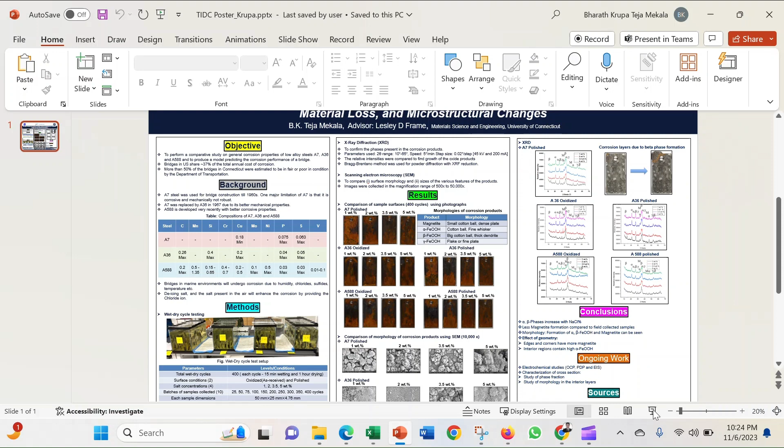As shown in the title, Prediction and Prevention of Bridge Performance Degradation Due to Corrosion, Material Loss, and Microstructural Changes, this work mainly focuses on steel corrosion, specifically the steel used for bridge construction.

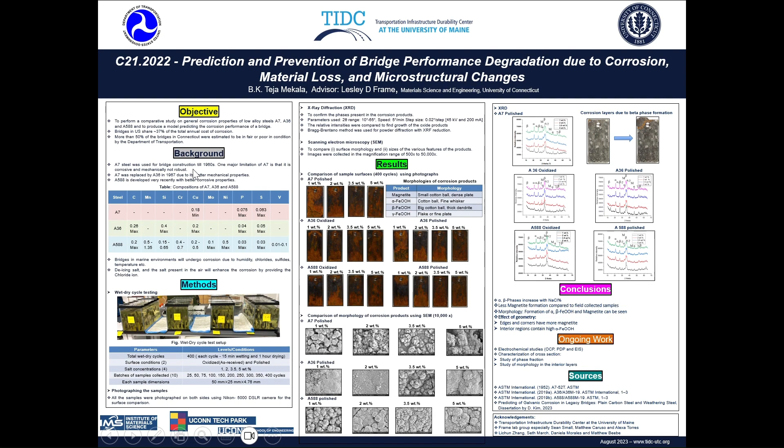This work focuses on the low alloy steels A7, A36, and A588 to study the general corrosion properties and to produce a model at the end of the study to predict corrosion performance.

Before going into the details, I would like to share a couple of facts: bridges in the USA account for 37% of the annual total cost of corrosion. On top of that, more than 50% of bridges in Connecticut were estimated to be either fair or poor in condition by the Department of Transportation.

I would like to give a little background about the low alloy steels that are used for bridge construction.

A7 steel is one steel that was used for bridge construction until the 1960s. As shown in the table, the composition of A7 does not specify any limits regarding the alloying elements except copper, phosphorus, and sulfur. One big limitation of A7 steel is that it is poor in corrosive properties and not robust mechanically.

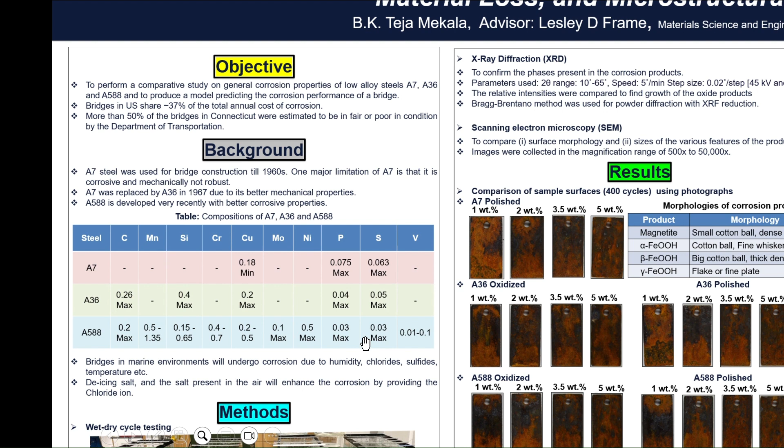With many modifications, A36 steel was developed, which specifies the limit of carbon and silicon, along with copper, phosphorus, and sulfur. But still, A36 steel was not very good in its corrosive properties. Later, in more recent years, A588, also called weathering steel, was developed.

Another reason why bridges in Connecticut face poor corrosive properties is because of the marine environment, which poses salt in its surroundings. Even the de-icing salt applied during winters causes corrosion problems by providing chloride ions.

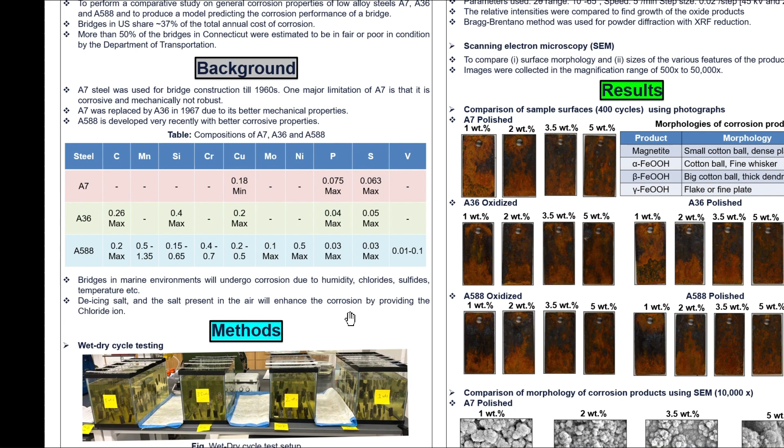Now I would like to talk about how we perform the study to understand the corrosive properties of these steels.

We used the wet-dry cycle testing method as shown in the figure. We took water tanks of 10 gallons in size each, with each tank designated for a specific salt concentration. Four salt concentrations were used: 1, 2, 3.5, and 5%.

Two surface conditions of the samples were used: oxidized and polished. In the wet-dry cycle testing, each wetting time in the cycle is 15 minutes and drying is for 1 hour, with 400 such cycles performed.

Batches of samples were collected at different time points as shown in the table. Each sample's dimensions were 50 mm by 25 mm by 4.76 mm, and the collected samples were photographed using a Nikon 5000 DSLR camera for surface comparison.

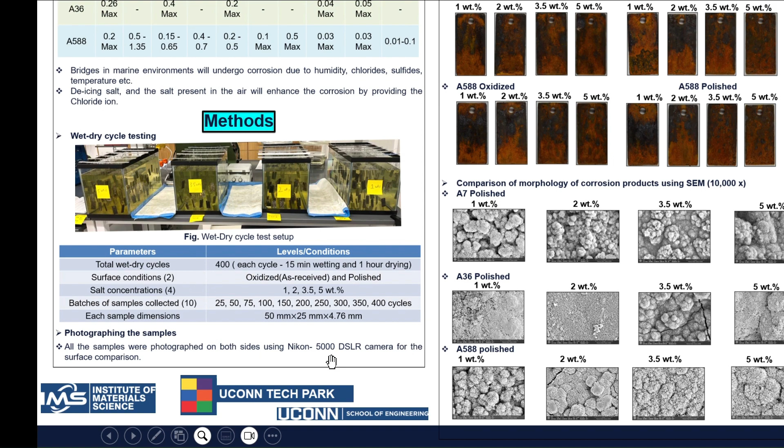Once the samples were collected, X-ray diffraction was performed to confirm the phases present in the corrosion products, with the parameters used mentioned here.

The 2-theta range used was 10 degrees to 65 degrees, with a speed of 5 degrees per minute and a step size of 0.02 degrees per step. The Bragg-Brentano method was used for the powders with the XRF reduction mode.

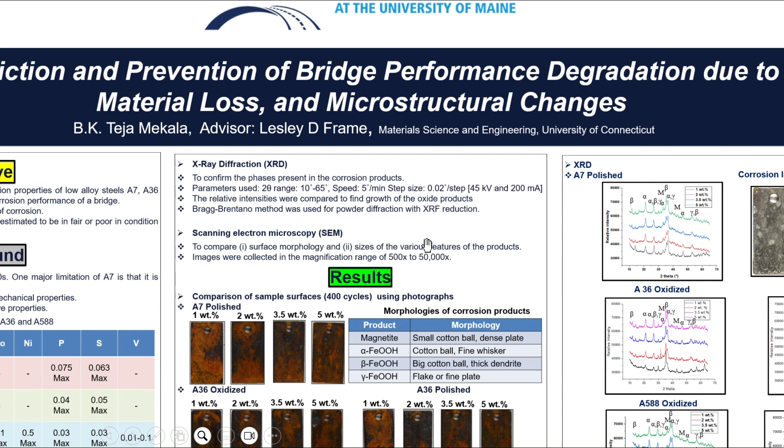Scanning electron microscopy was also used for surface morphology study and to compare the sizes of various features of the corrosion products. Now I would like to talk about the results.

Before I dig into the results, I would like to start with the different corrosion products that will be observed in the photography and SEM.

The four products are magnetite, alpha, beta, gamma FeOOH. Most of the products are in the morphology of cotton ball shape, differing in the features present on the cotton ball. Magnetite has dense plate features, and alpha FeOOH has fine whisker structures on the cotton ball.

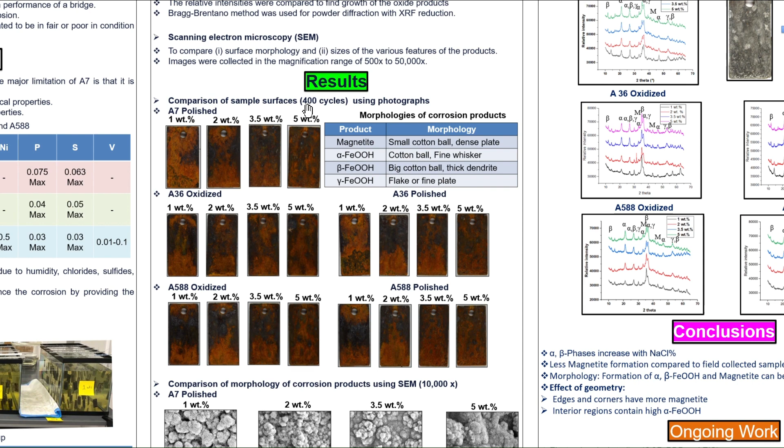Beta FeOOH has thick dendrite shapes on the cotton ball, whereas gamma FeOOH has flake or fine plate structures. But this gamma FeOOH is found only during the initial stages of corrosion formation, and it is not expected to be present at 400 cycles.

So I would like to start with the photographs of the samples. A7, A36, A588 samples are shown here, and every sample has two colors, black and orange. The black color region is for magnetite, and orange is for alpha or beta FeOOH.

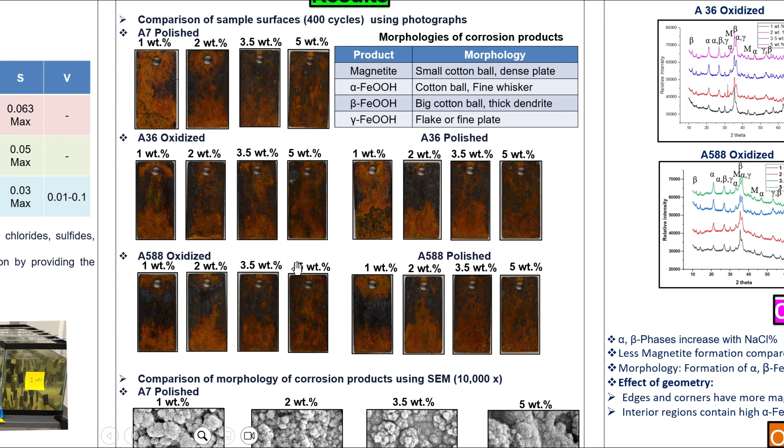We can see that black is present usually at the edges or corners, and orange is at the center or interior regions. So we can say that magnetite is usually at the corners and edges, and the interior has alpha and beta FeOOH.

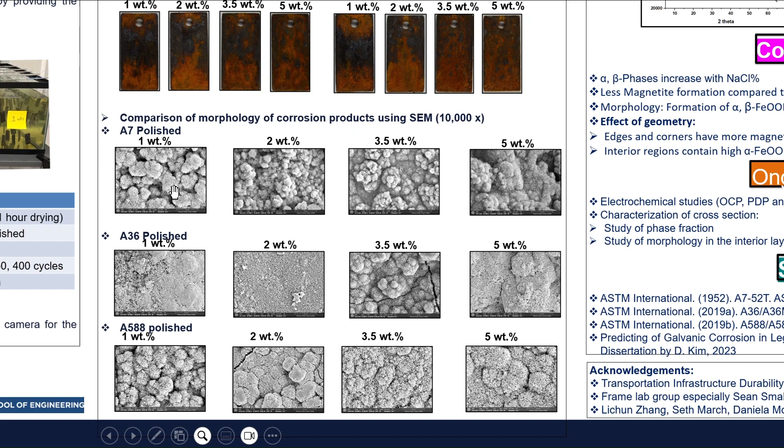Coming to the SEM images, we can see the presence of various phases. For example, this is a big cotton ball structure, as we were talking before, with very good dendritic structures.

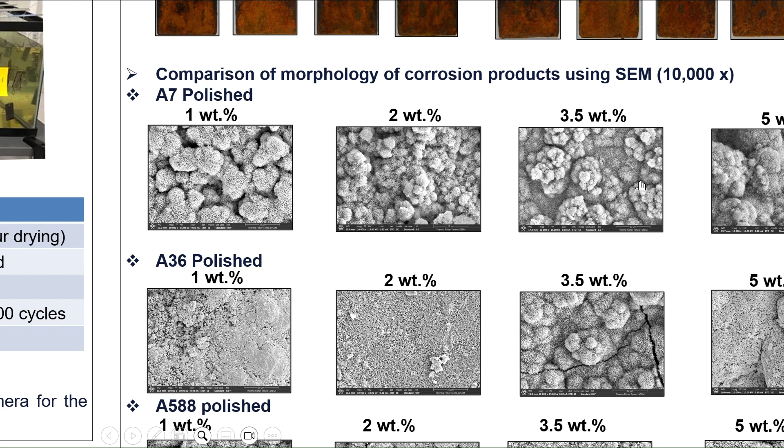This figure corresponds to alpha FeOOH with small cotton ball with flaky structures - sorry, it is with fine whisker structures. And this corresponds to small cotton ball with densely packed structures.

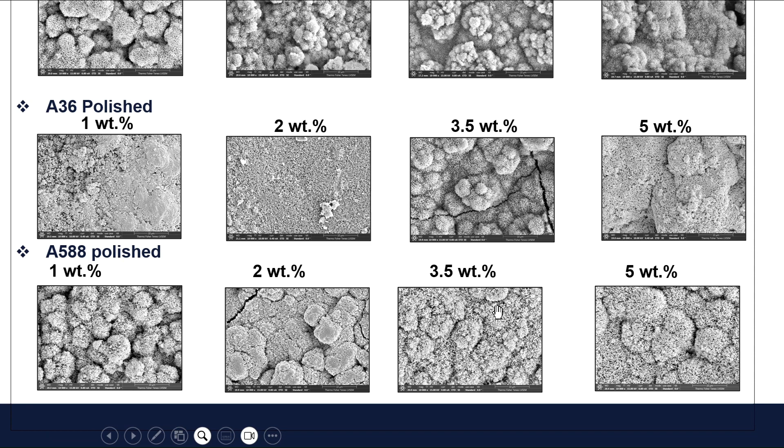So this can be called magnetite, and this is again alpha FeOOH. This is magnetite, and this is beta FeOOH. This is alpha FeOOH, and this is magnetite. So SEM is used for confirming the presence of different products.

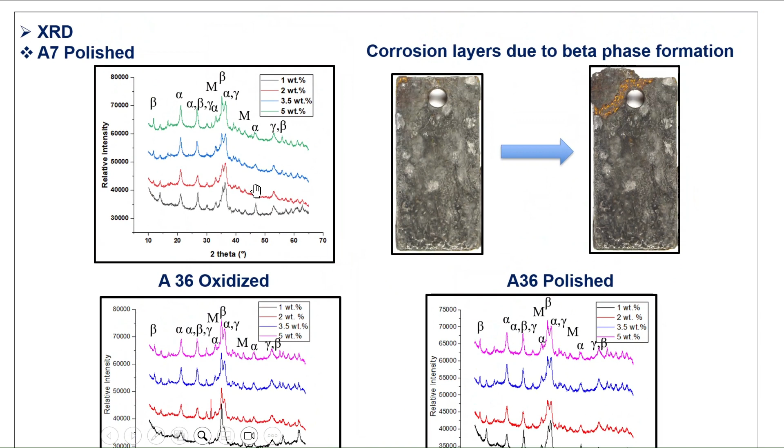Coming to the XRD, we can see the presence of the beta peak, and this peak also increases in size with increase in the salt concentration. And even in the case of alpha, the alpha is growing with increase in salt concentration.

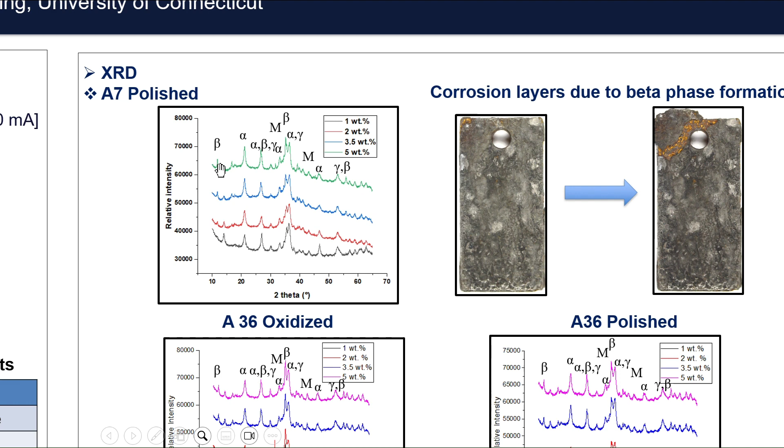Beta formation is really dangerous for the bridge performance because of the reason explained through these figures. When beta is formed at the interface, the corrosion products will spall off in the form of layers like this. Because of this, the product formed is no longer a protective product, and it will hinder the corrosion performance of the steel without forming a protective layer.

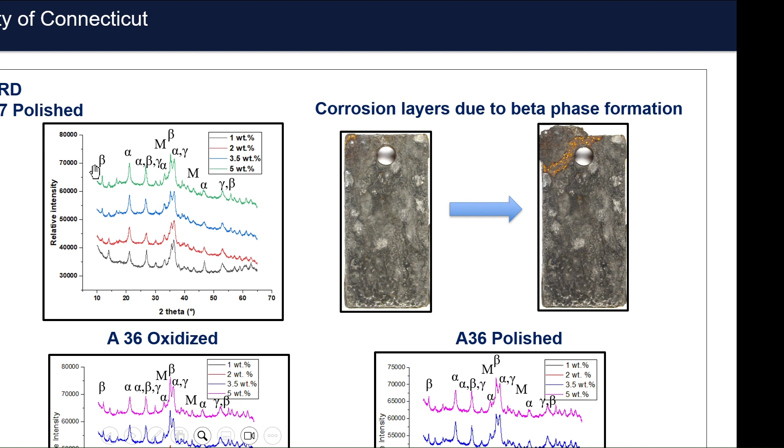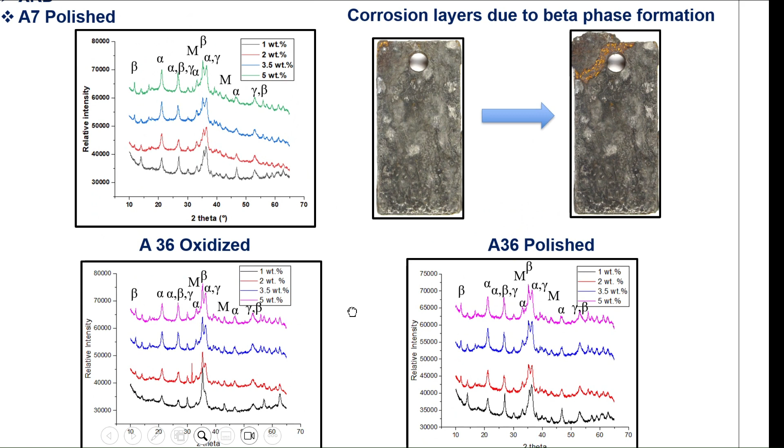So the presence of beta is not at all desirable, since it hampers the very good surface properties. We can see similar performance even in A36 and A588, that beta will increase with salt concentration as alpha does. But the beta peak is really high in the case of A7, less in A36, and

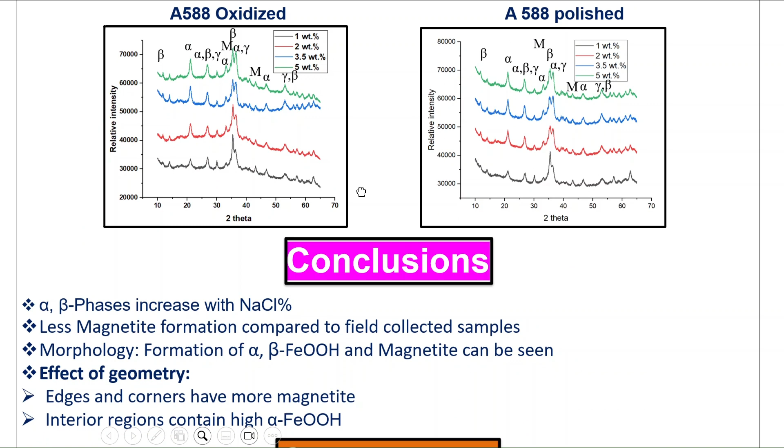very less in A588. So coming to the conclusions, we can say that alpha and beta phases increase with NaCl percentage, and less magnetite formation is seen compared to the field collected samples.

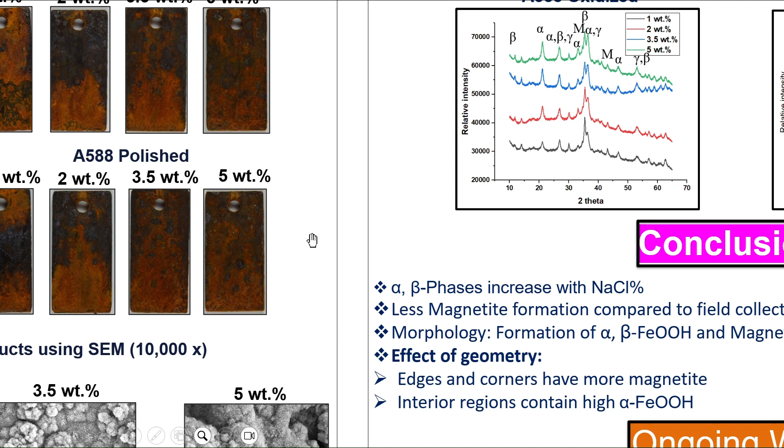The field collected samples overall occupy the blackish regions, that's why we can say that they are all full of magnetite. But here in the 400 cycle samples, magnetite formation is very less.

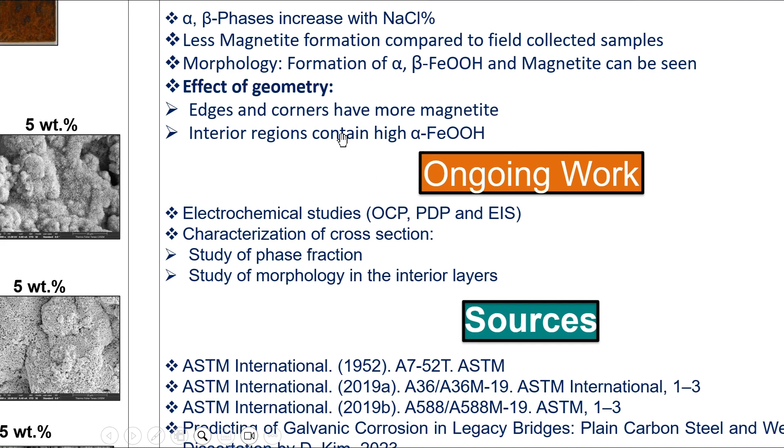We have seen the morphology of alpha, beta, and magnetite, and we also have seen the effect of geometry, that edges and corners have more magnetite and interior regions contain high alpha FeOOH. And even the formation of beta is higher in A7 and lesser in A36 and A588.

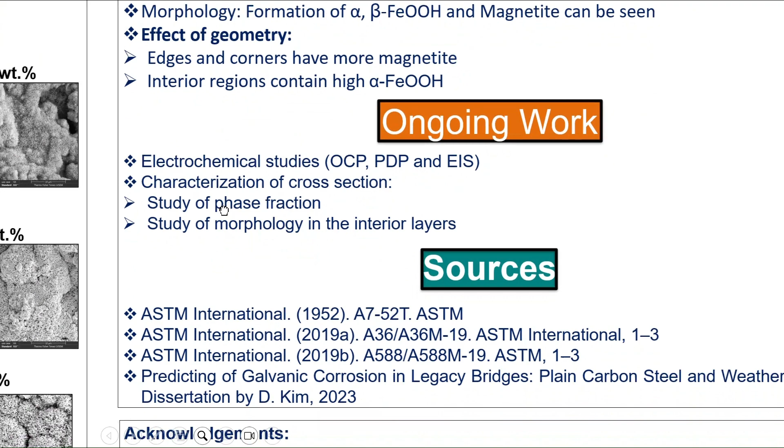So about ongoing work, we wanted to study the electrochemical studies and characterization of cross sections.